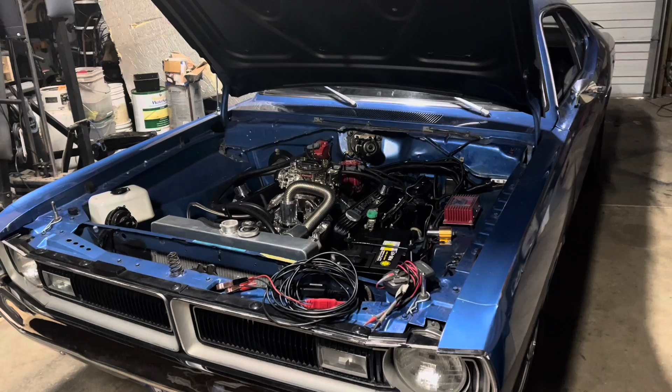Blech. Oh yeah, I'm sick.

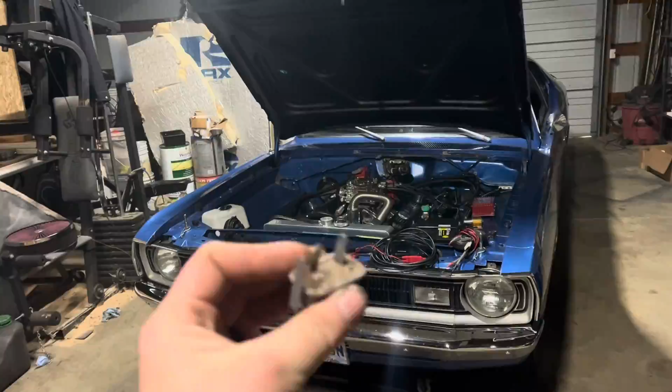The short, easy answer is, I don't know. The long, accurate, and slightly more detailed answer is, several reasons, actually, but probably the most important among them is this: the Chrysler electromechanical gauge voltage limiter. Now, for this lesson, I have to uninstall my temporary permanent assemblage of test leads from the boat trailer.

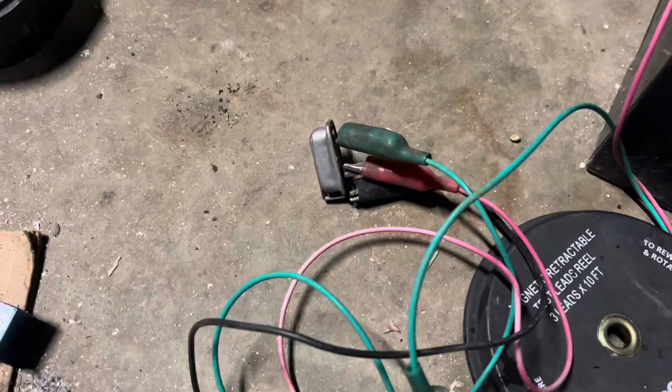Here I have the regulator rigged up to a battery, so you can see how it kind of works. Power in on the middle pin, ground on the one that goes to the case, obviously. And the green is the output. I've got the cable here and this terrible rusty clamp. And over here I've got the world's worst multimeter, which I have to hold with my foot to keep it working. If you watch the screen, you can see what this thing does.

The voltage fluctuates some. It'll go up to about 6 and back down. And it just kind of hovers around there and keeps the voltage in the range that won't burn up the gauge. The gauge is designed to run on, well, 6 volts, I guess. 5 to 6 is fine.

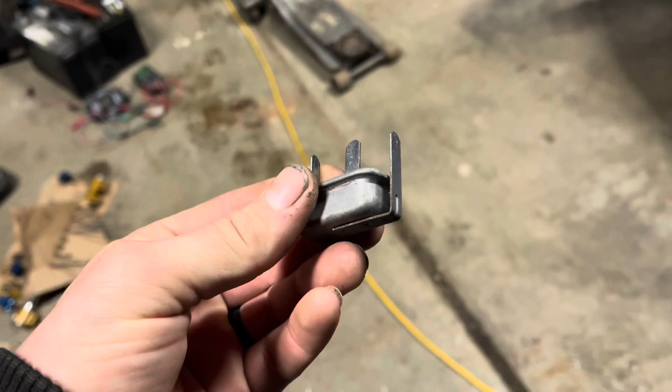This is a Stone Age electromechanical device. There's a bimetallic strip in here which opens and closes and keeps the voltage around where it needs to be. Common failure modes for these: either they break internally and you get 0 volts, or they short out and you get 12 volts and all the smoke comes out of your fuel gauge.

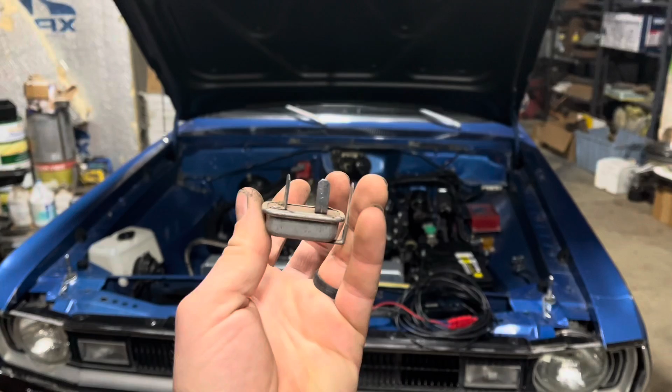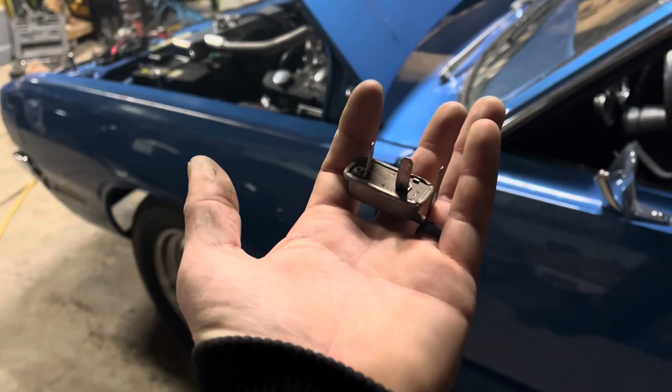This is a random one from the spare charger cluster. These are found in basically all muscle era Chryslers. There are different versions. In some earlier cars, say from 66 and back, they're built into the fuel gauge, which is lots of fun when that dies, inevitably. But this is pretty common to find. I'm not going to get up behind the cluster of the Demon right now, but there's definitely one of these up there. I showed you this first because it's culprit number 1 when your fuel gauge is dead.

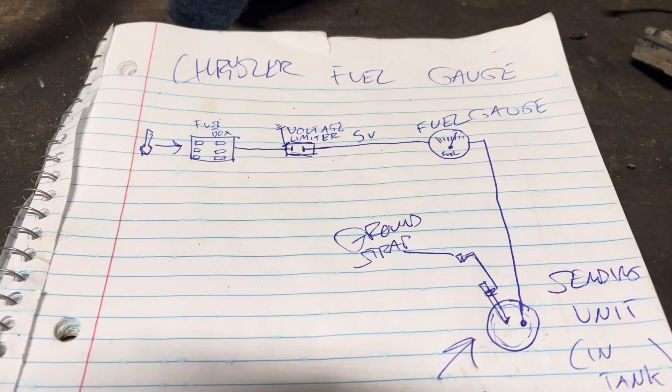But there are a couple other components you need to know about: the gauge and the fuel sending unit. I'm using the Demon as an example because the fuel gauge is actually dead. Dale seemed to think that it's probably the sending unit in the tank, and he may well be right, but I wanted to go through the steps and verify that. Before we actually dive in on the car and look at stuff, I came up with this handy diagram to show you the different components here.

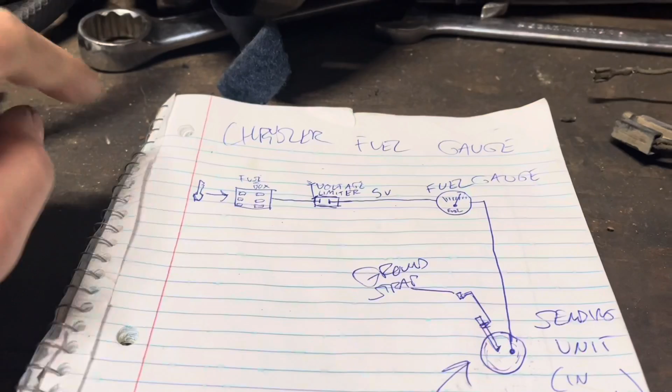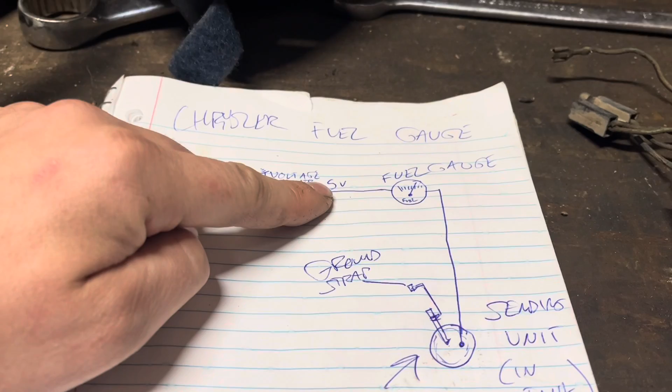It's a relatively simple circuit, but there's some voodoo in it. When you turn your key to run, one of the fuses energized in the fuse box sends output to the voltage limiter on the back of the gauges. You know, that little thingy. And you can see here, there's power input, power output, and of course, a ground, which is important. Let's just call this 5 volt output for simplicity. It goes from the limiter to the fuel gauge.

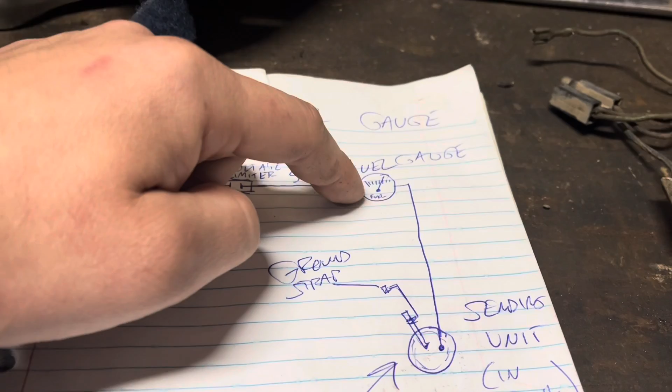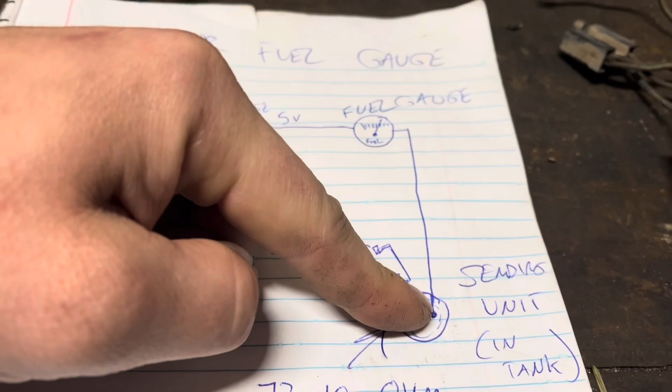The fuel gauge has 2 posts. Positive in, 5 volts, regulated, and ground, which goes through a variable resistor, the fuel sending unit. That resistance varies from 73 ohms empty to 10 ohms full, which is incidentally the same as Ford. So if you can't find a sending unit that fits your application, but you can find one for like a Bronco or a Ranger, you can use those parts to fix your Mopar.

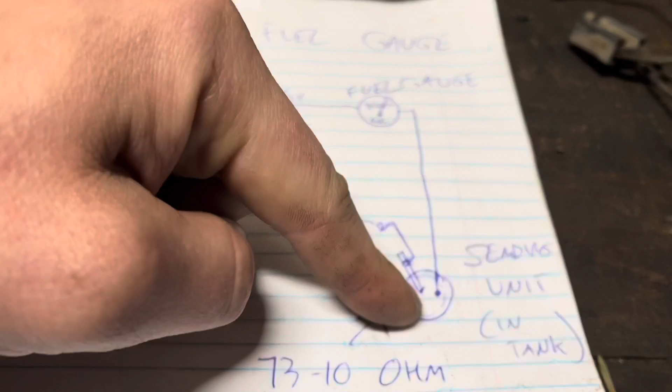Ground finally does return through the body of this sending unit and through a ground strap, as this thing is mounted in a rubber ring. It may be able to ground through your fuel tank, but the engineers deemed that unreliable and added this strap. If that's missing, well, that could be your problem too.

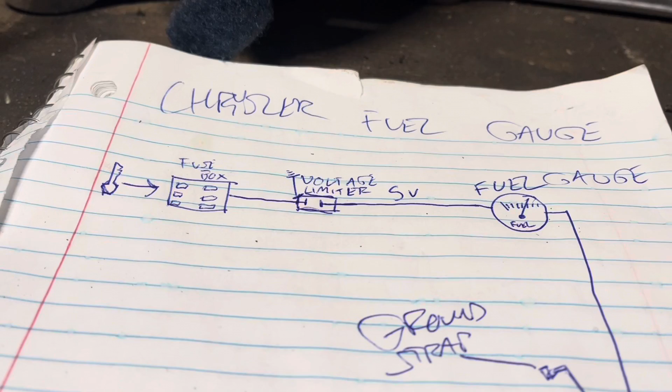Important side note: if you're driving down the road and all of a sudden your gauge pegs out when it shouldn't, you could pull over and shut your car off and find the gauge fuse and remove it before your fuel gauge is totally dead. This guy's going to be your problem. Fix that thingy, put the fuse back in, and all will be well.

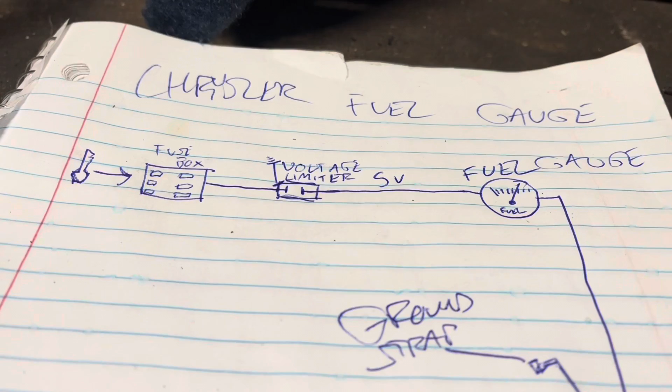I'm not going to try and tell you which fuse it is. This is going to vary by vehicle. Just find a diagram for your car and you'll figure it out. These cars are 50 years old at this point, and it's very common to have this issue. If your gauge doesn't work at all, it's likely the limiter is dead.

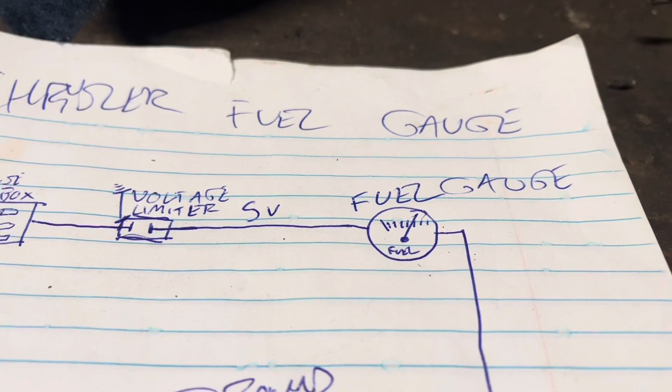Unfortunately, you're going to have to go through some steps to figure out if it's just the limiter, or if it's stuck in the closed position, put full 12 volts on this wire and cooked that thing years ago. It can be a little tricky, but step one is verifying a limiter. As with most electrical things around here, I will be completing these tests with my power probe, which, yeah, it's still slightly broken, but it does work.

If you don't have one of these, which would not at all surprise me, a voltage meter or digital voltmeter or multimeter will do just fine. You can use the test light to see if you've got power, and you could test the low voltage circuits by seeing how dim the light is. I'm gonna say that's probably not reliable. I'd go with the meter, unless you're really old school.

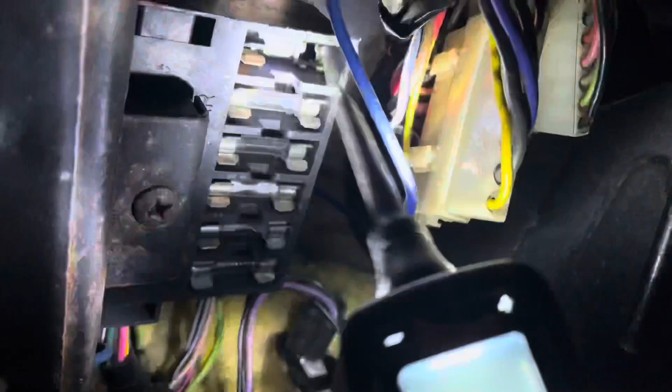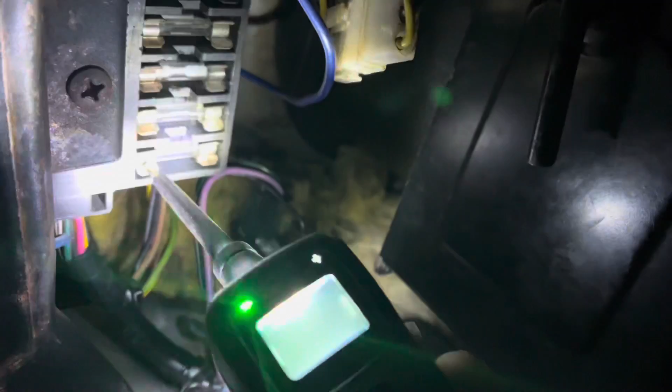If you do have a power probe, here's a fun and easy test. Take it to every fuse, which is really hard to do through the screen, and make sure you've got power on both sides. I do, except on this one, but this one is for gauge lighting, so that's fine. The gauge lights aren't on. Alternatively, find a diagram for your car, figure out which fuse is for the gauges, and check for power on both sides with the key on.

Now, not all regulators are created equal, and what I showed you on the other one may not even be normal. I don't even usually bother with this step. I usually jump right to upgrading them. More on that in a bit. But in the Demon, this is what I seem to have. It fluctuates from 10 or 11 or so to 0. That makes sense. Averages out to about the right voltage. So I'm going to say the regulator is fine. And since my temperature gauge works, well, I already knew that. But there you go.

You know, I was going to say something earlier, but I don't know, I didn't. It's early. I've only had one coffee.

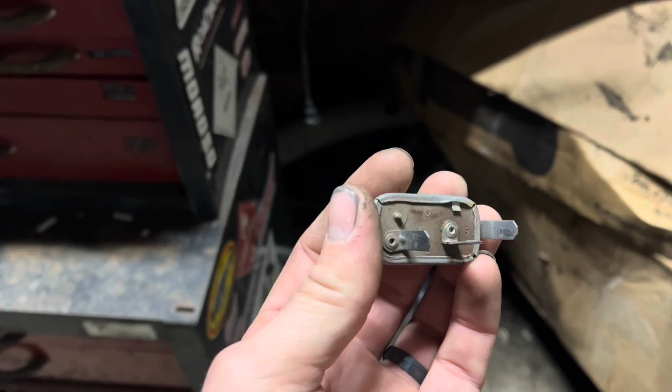The reading coming out of this didn't really look right. I don't know what that's about. What it's supposed to do is switch on, off, give the gauge full 12, 0, full 12, 0, and it averages out to about 5 volts. This one was putting out 6, and then 2, and then 6 again. So I don't exactly know what to make of that, but it is what it is. This one's probably bad, but who knows?

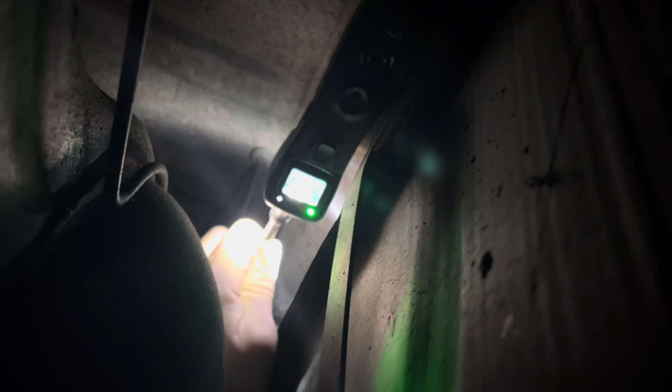Anyway, now we're under the car, and there you can see the one wire going to the sending unit. Well, you can kind of see it. Whatever. Anyway, tucked here between the axle and the fuel tank. Now, there are 3 tests we can do here. The first is verifying the integrity of the circuit from the gauge to the tank. As you can see here, I have the same fluctuating off-on voltage signal. So we're definitely getting voltage from the gauge.

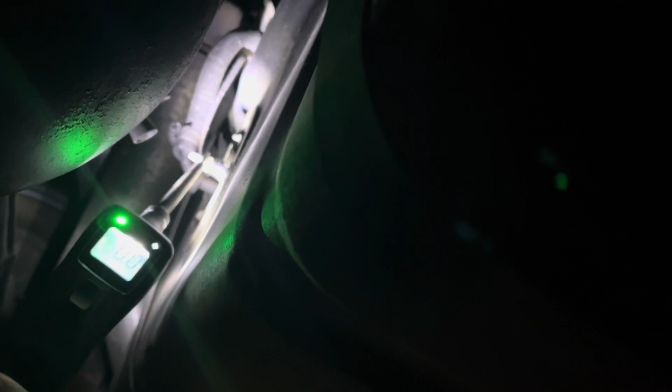The next test we can do is ohm out the sending unit. Since I don't have my multimeter, I went ahead and just hooked the power probe on there, and it shows ground. Now, it doesn't give us a resistance. There certainly is some, but I don't know how much. Either way, though, that tells us there is a path through this thing back to ground through this strap, which is in place.

The other test is to put the power probe in here and ground it out. Not for long now. This could do bad stuff, but for long enough to check the gauge and see if it moves. Because I don't have an assistant and I don't want to leave it grounded for long, I'm going to use the magic of video. Pay attention to that fuel gauge right there. Well, I grounded it out underneath the car. Here we go. Well, what do you see? Is it doing the stuff or not? And back up. Oh, it definitely did the stuff.

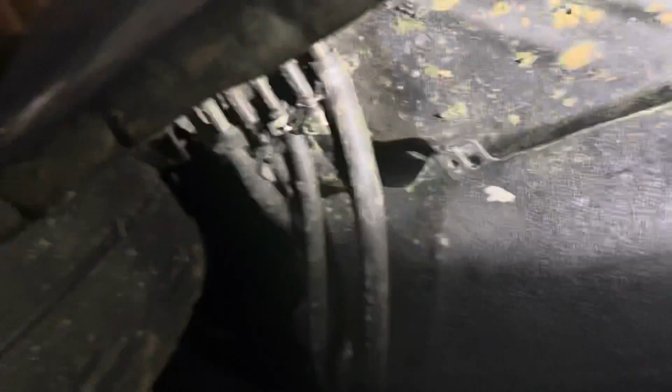Oh, hey, while we're under here, note the 4 lines that go from the fuel tank up into that breather pipe in the trunk. This is '71 only. And admire what a solid trunk floor looks like. Never seen one before.

There you go. I solved my problem. It is, in fact, the sending unit. Dale was right. The one thing about that is it's clearly not original. I think it was new when the tank was replaced, but it's bad anyway. Even weirder, you know, there is a path to ground through it, so it's not broken internally.

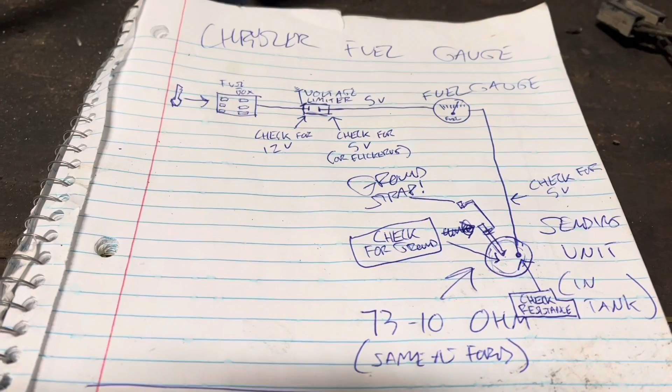I have a guess about what's wrong, and my guess is the float's cracked, and it's probably full of fuel. And at some point when the tank's less full, I'll probably drop it, pop that thing out of there, and verify that. A couple more notes here. This is everything I just did. Check for 12 volts going into the limiter, which I actually did over at the fuse box, but it's fine.

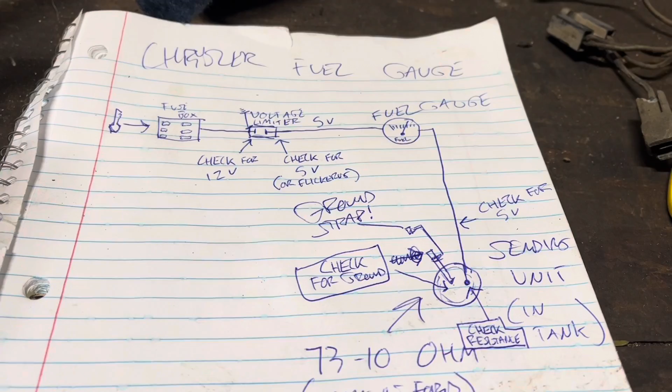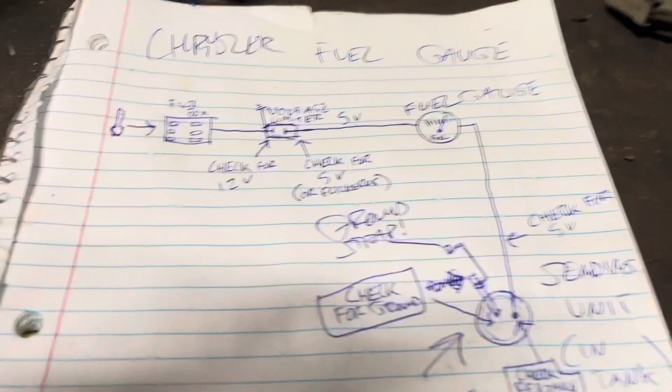You'll notice in that shot up behind the dash, we couldn't actually see the limiter, so this was about all I could do. I checked the input going from here, and then I checked the output at the back of a couple gauges, and it was correct. You need to make sure there's power going into your limiter and 5 volts coming out, or a flashing on-off, 12 volts, no volts, 12 volts, no volts, etc.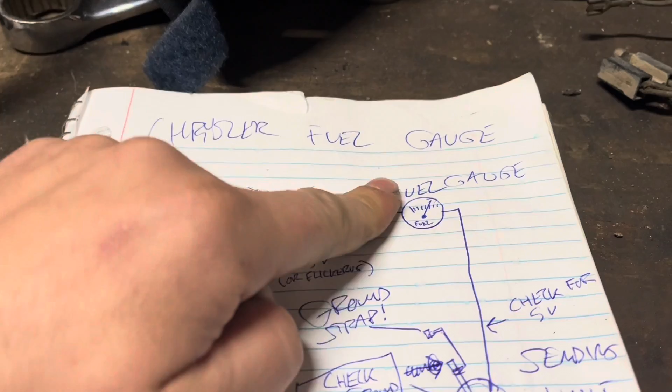You can check that same signal here at the wire going into the sending unit. It should look the same. 5 volts, 6 volts flickering. It shouldn't be solid 12 anyway, that's important. You then check the resistance with this wire disconnected of your sending unit. It shouldn't be an open circuit. There should be a path to ground through there, and it should be somewhere in this range. But if you've gotten to here and everything else looks good, it probably isn't.

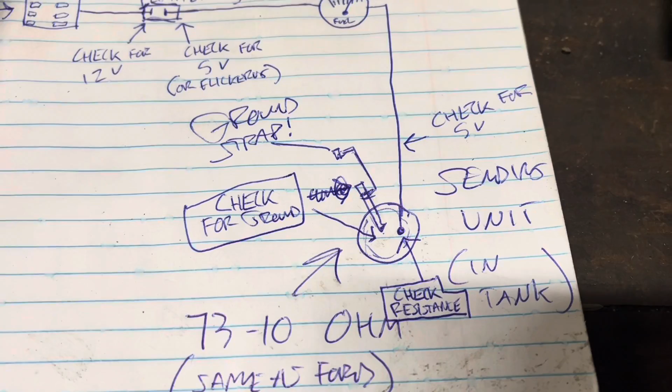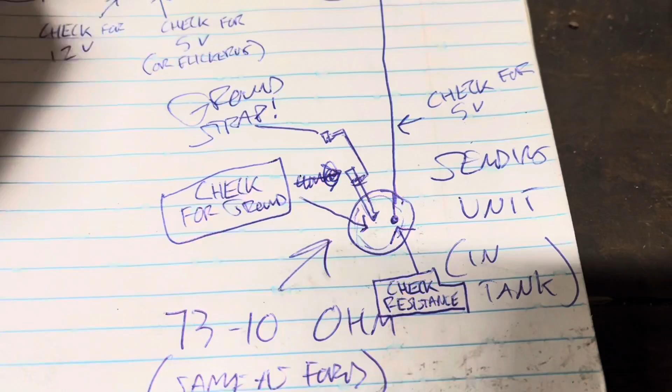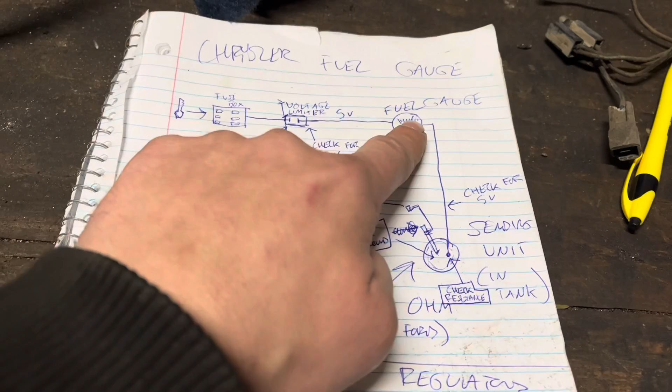You also need to verify that there's ground at the body of the sending unit. That's where it grounds through. This is its path here to get back to the car. But you should have ground here if all is well. Going through all those checks in that order should show you where in the circuit your problem is. If you don't have this, but you have it here, your gauge is bad. There you go. It does happen.

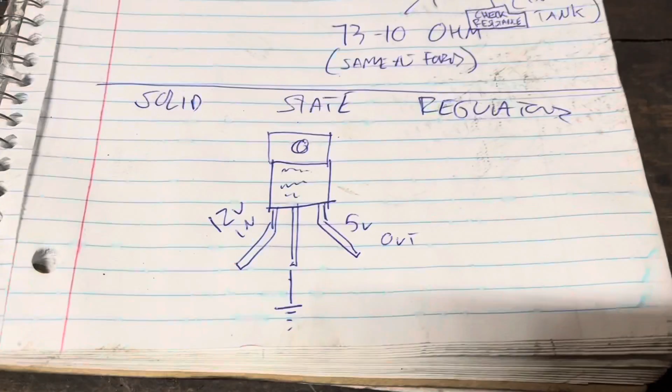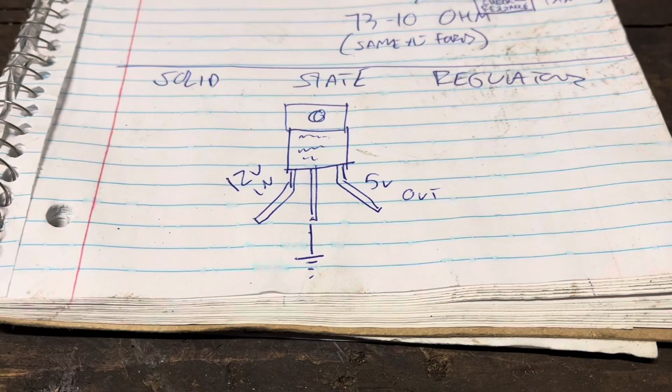Now, as I mentioned, I actually don't have a whole bunch of experience testing these things because, well, they're usually bad, and I often jump straight to installing a solid-state regulator. You used to be able to buy these at Radio Shack, but, well, you don't see them around anymore, do ya? This is a solid-state voltage regulator, or limiter, that takes 12 volts nominal in, so 12 volts-ish, and puts

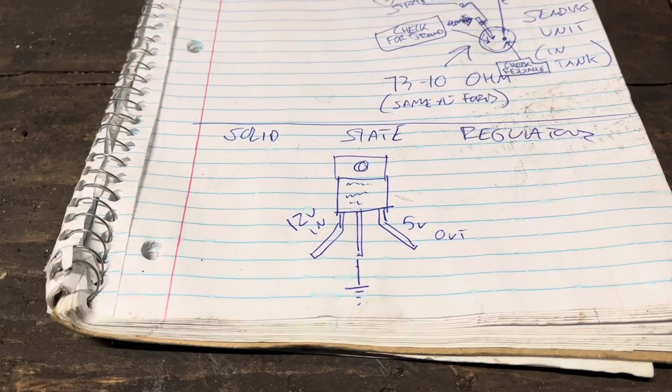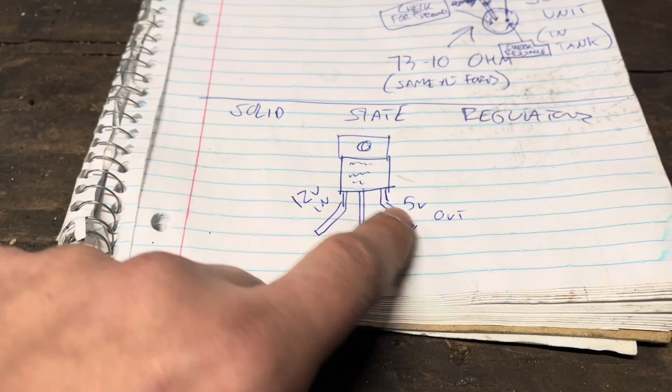out 5 volts. It's not exactly the same as the output of the original electromechanical unit, but it's really close, and more importantly, it's rock solid. It may change your reading somewhat, but your gauge should work. 12 volts gets put in here, and 5 volts comes out here. I screw these to the back of the clusters, and I run an extra ground wire here to a screw, separate, or that one. And that's all there is to it.

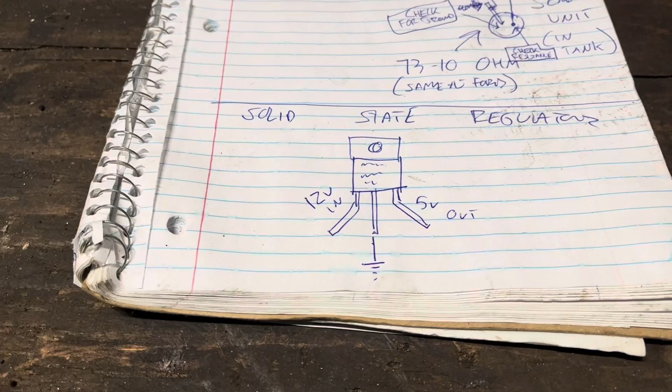Well, other than making absolutely sure these don't touch the body of the cluster and become a fire. Yeah, it's real easy to do, they're cheap, and it works very well. Now, another cool thing if you're putting a car together, once you kind of understand how these circuits work, well, it's pretty easy to test them on the bench. And all you need is this mess.

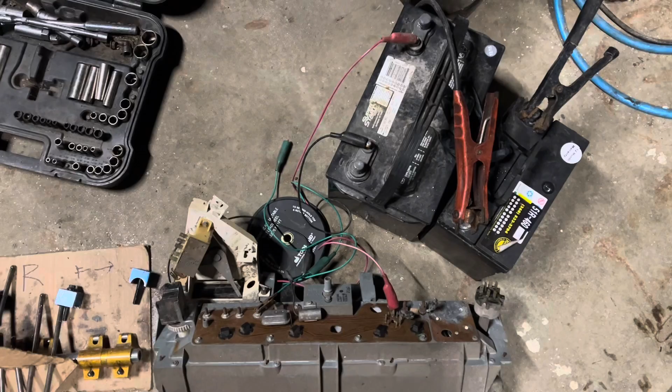I hope this helps clear up some of the magic and mysticism around this small piece of the Chrysler electrical system. Again, it's a pretty simple circuit, but they fail all the time. I've been playing with these cars for, how long? 15 years. And, well, it's pretty much a rule that any old Chrysler you get that's been sitting around is not going to have a working fuel gauge. So I've had more than a few times going through these, and I hope my knowledge helps.

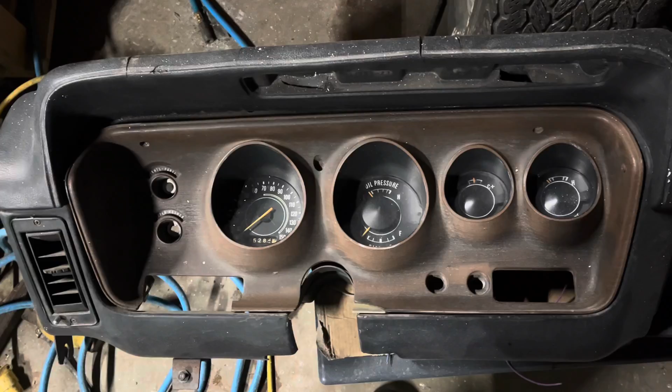What are the chances this one works? I'm thinking low. But even if it doesn't, at least we can fill this big gaping hole. More gauges to test. Fantastic.

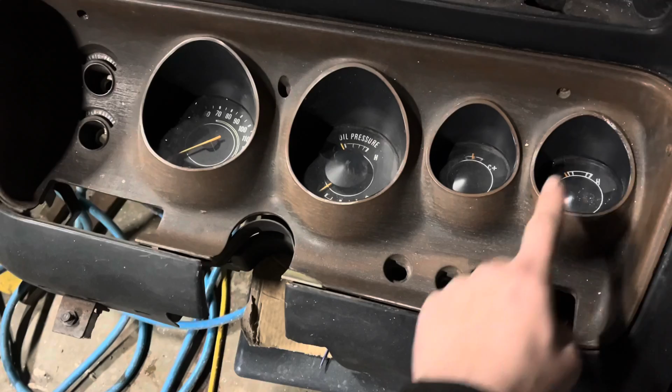Oh, hey, one more note. Your temperature gauge is run by the same regulator that runs the fuel gauge. So if both of them are dead, this is probably where you should look first. And if you're lucky enough to have a real oil pressure gauge, it's run by it too.